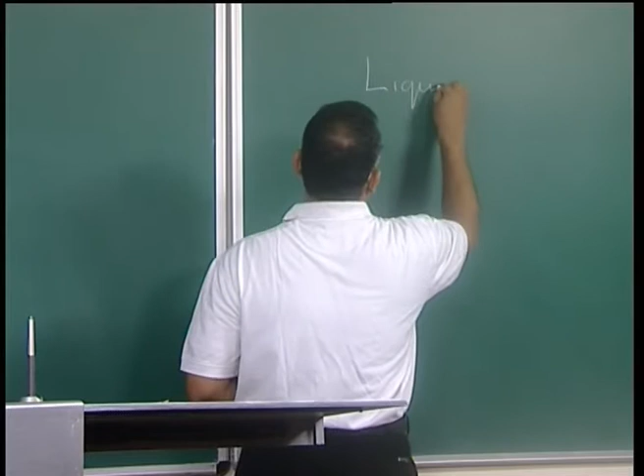So far we have studied phase transformations, and even when we consider a simple phase transformation, for instance, suppose I am talking about solidification from the liquid state to the solid state. For now I will assume that there is a pure metal which is in the liquid state which is getting solidified. So the final solid typically consists of a polycrystalline microstructure.

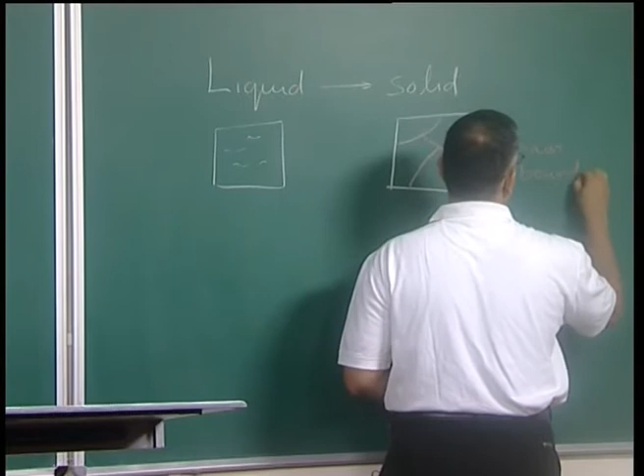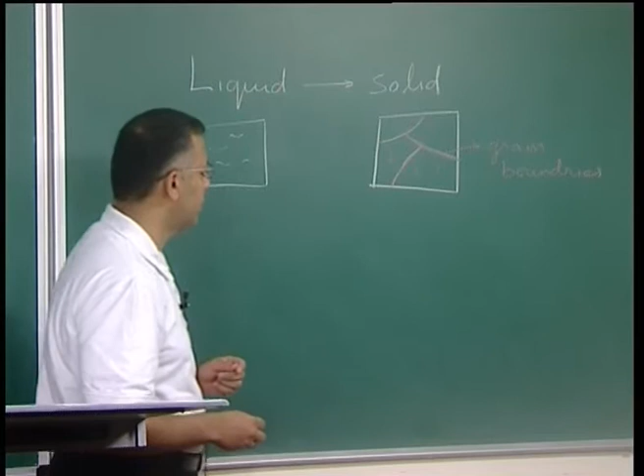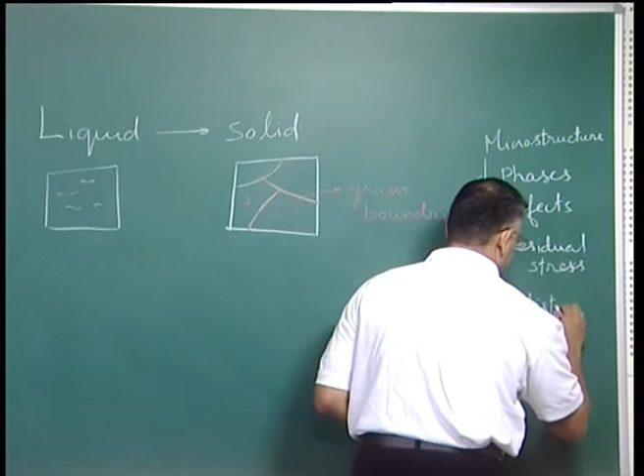That means there are entities like grain boundaries, and within these grains themselves there are defects like dislocations present. That means that along with this phase transformation, I have a complete transformation of the microstructure, and we have already defined a microstructure as... so along with this phase transformation, whereas the simplest one we can think of, a pure liquid going to a

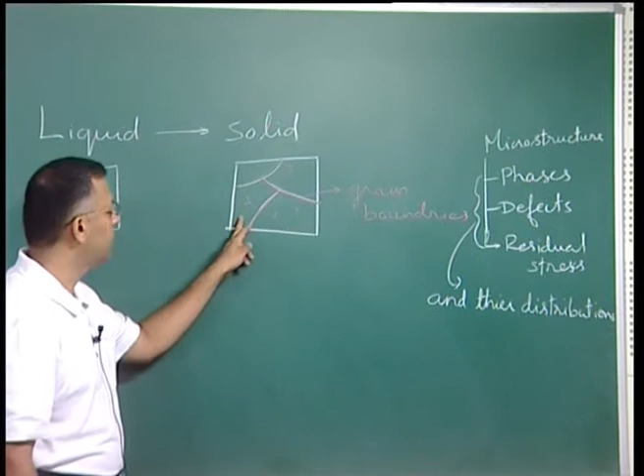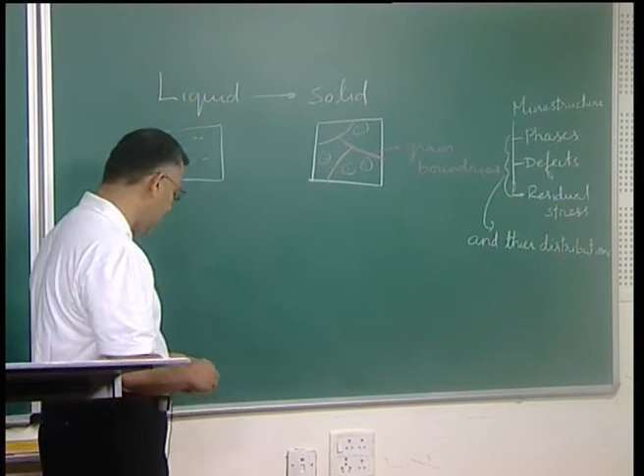solid, we have complete change in microstructure. For instance, the solid phase forms, there are defects like grain boundaries and dislocations, and there are stress fields associated with these dislocations. That means that all the components of the microstructure change when there is a phase transformation. But let us now consider certain other types of transformations wherein in true sense there is no change in the phases, but it is the subtler aspects of microstructure which get transformed.

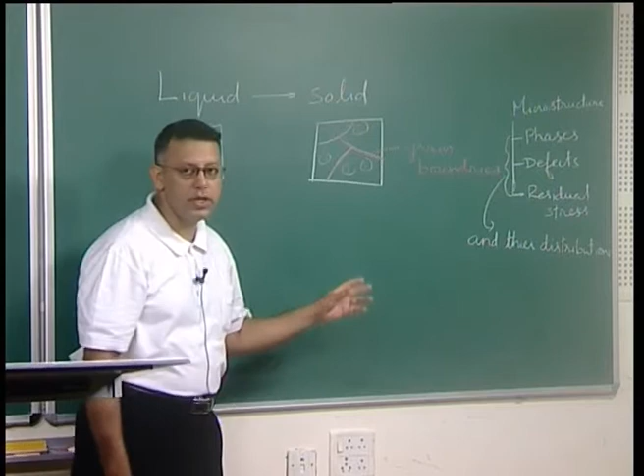So let us consider those kind of features, and we talk about three of them here. One is called recovery, other is recrystallization, and third is grain growth.

Suppose we plastically deform a material, and we typically call this, when you do it under cold conditions, as cold work. Under such circumstances, typically the point defect density, typically vacancies etc., increases, and also the dislocation density increases.

Now, at the end of these set of slides, we will try to understand the correct definition of cold work. For now we will assume that it is a temperature regime, that means we are at a low temperature regime. Typically let us assume now that we are less than about 0.3 Tm, and we are doing working which is called cold working, and in the process we are increasing the defect density, which includes the point defect density and the dislocation density.

So when I am doing cold working, the material becomes a store of energy and the strain energy in the material increases. Typically if you are spending say X amount of energy, about 1 to 10% of this energy expended is stored in the form of strain in the material, and this strain typically we have seen is via the increase in dislocation density and other defects within the material.

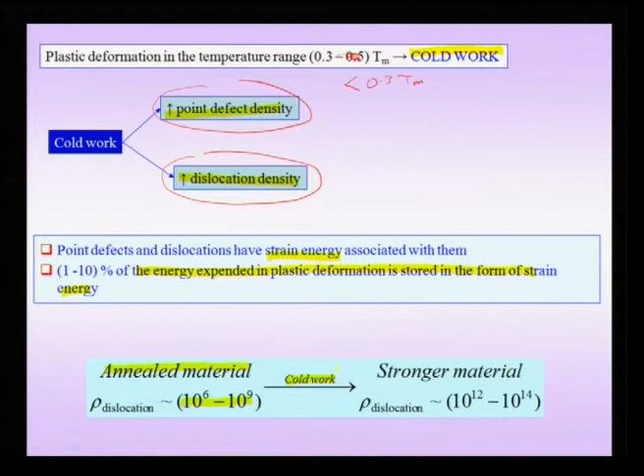Now that implies that suppose I have a well annealed polycrystalline material, like let me take copper or aluminum. The dislocation density is of the order of about 10^6 to 10^9, and when you do cold working of this material, not only does the material become stronger because of this cold work, but the dislocation density increases to about 10^12 to 10^14.

In fact, it is the increase in dislocation density which is causing the increase in strength of the material. So there is a few orders of magnitude increase in dislocation density, and as you have seen, the strain fields of these dislocations store energy, and about say for instance about 1/10 or about 1/100th of the energy expended in cold work is stored as strain energy within the material.

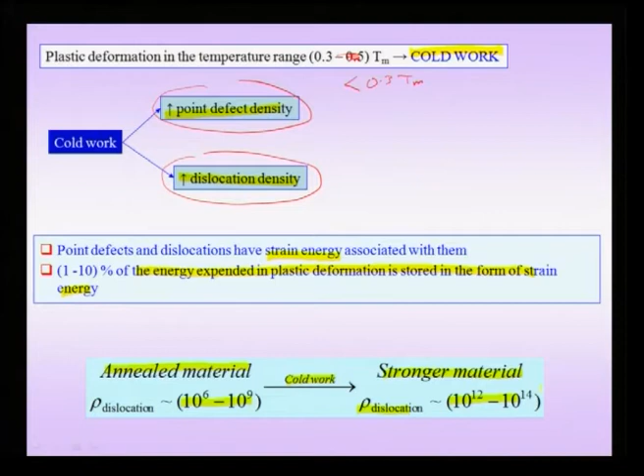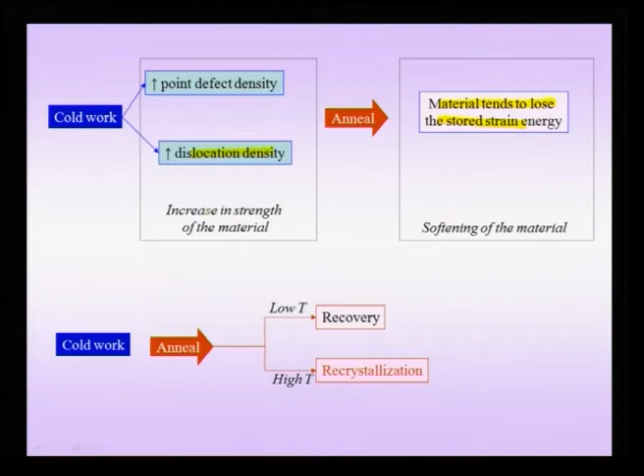Now when you anneal such a material, that means heat it to some temperature and hold it, the material tends to lose the stored energy and tries to come back to its original state. That means a state wherein the defect density is small, and that implies if I am doing cold work, I have an increase in defect density leading to an increase in strength of the material, and after annealing the material becomes softer and the dislocation density would decrease.

This annealing itself can be done under two circumstances. That means we can do an annealing under slightly lower temperatures, or we can do it at higher temperatures. At lower temperatures, of course, we are supplying less amount of activation energy, and the processes which take place are collectively called recovery. And at higher temperatures, we have the phenomena of recrystallization, and we will try to understand these technical terms in little more detail in the coming slides. So, we have a cold work material which has been plastically deformed, for instance by rolling, forging, extrusion, etc.

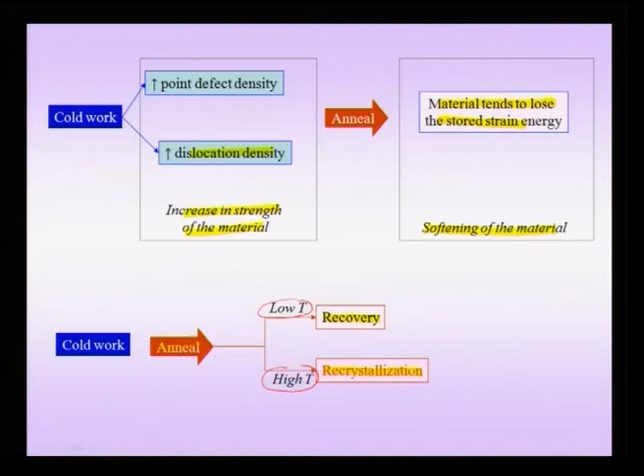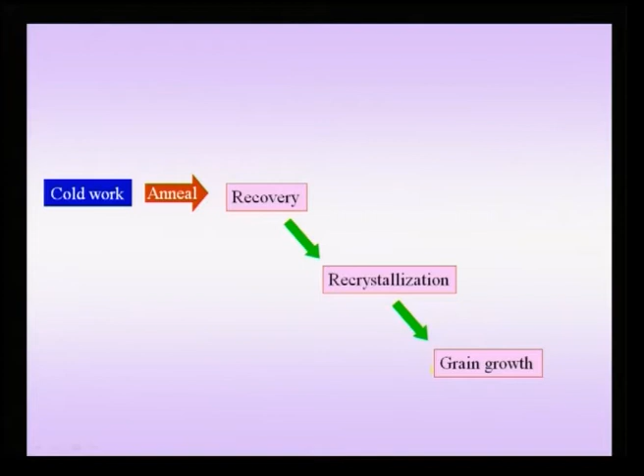After the material has been cold worked, if you heat it to a certain high temperature and hold it, there are two kinds of processes taking place within the material depending on the temperature. At low temperatures you have recovery, and at higher temperatures a phenomenon known as recrystallization. During annealing, if you hold at high temperatures, you would have recovery followed by recrystallization followed by grain growth. At even higher temperatures, there would still be recovery, but since the dominant process is recrystallization, we call it recrystallization.

So in this whole process, we see that the physical properties of the material change, including physical and electrical properties, and you would notice the material is changing its properties due to a change in microstructure. As we pointed out, there is actually no phase transformation involved in these processes - it is what you might call microstructural transformation.

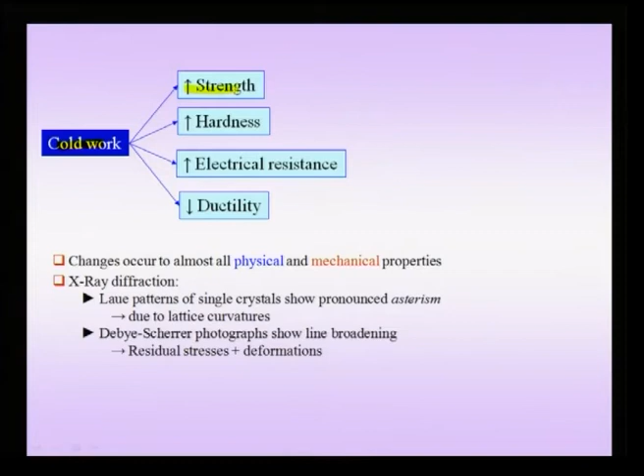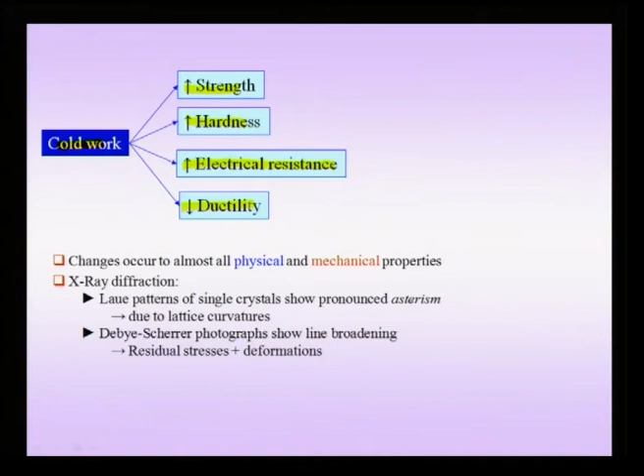Cold work leads to increased strength and increased hardness. It also leads to increased electrical resistance because of the point defect density increase and dislocation density increase, but the ductility of the material comes down. These changes typically occur to almost all physical and mechanical properties, which we call structure dependent properties or microstructure dependent properties.

In X-ray diffraction, you will notice that Laue patterns of single crystals show pronounced asterism - they look star-like and are no longer well-defined spots, and these are due to lattice curvatures. Debye-Scherrer photographs show line broadening, and this line broadening can be used to characterize the strain in the material - we can compute the strain by knowing the amount of line broadening.

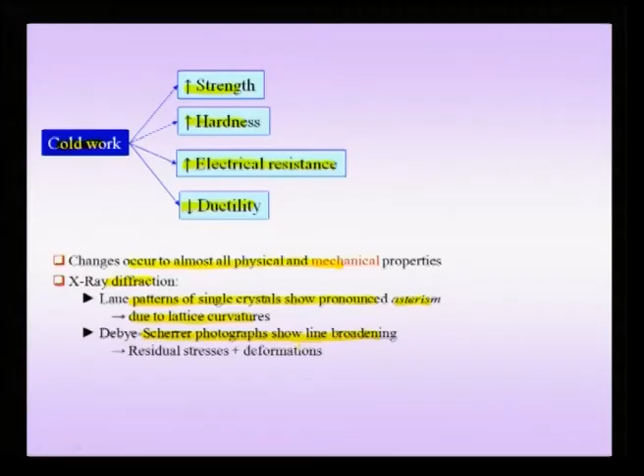So cold work changes many physical and mechanical properties, including strength, hardness, electrical resistance, and ductility. If you do annealing, the reverse, you can actually reverse and get back the material to its original well-annealed state. Now, what does this term recovery mean?

Recovery takes place at low temperatures of annealing, and if you look under an optical microscope, or even a scanning electron microscope - not a high transmission electron microscope - you would note that there is apparently no change in microstructure.

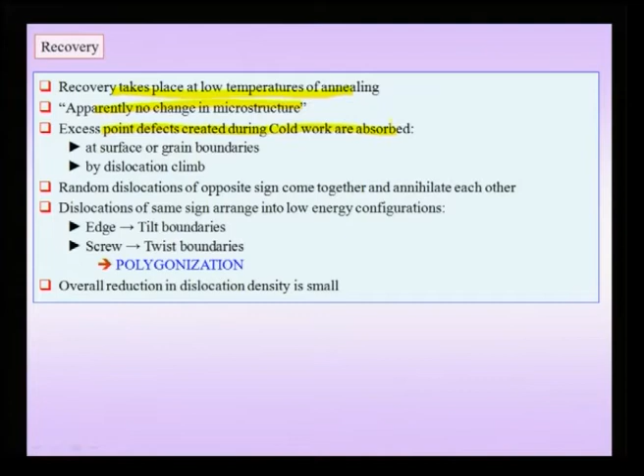This is because the excess point defects created during cold work are absorbed at surfaces and grain boundaries, and also by dislocation climb. As you know, it is not possible to observe vacancies or clusters of vacancies using optical or scanning electron microscopy. Even in a transmission electron microscope it is difficult to observe vacancies, and you have to use indirect methods to find evidence for their presence.

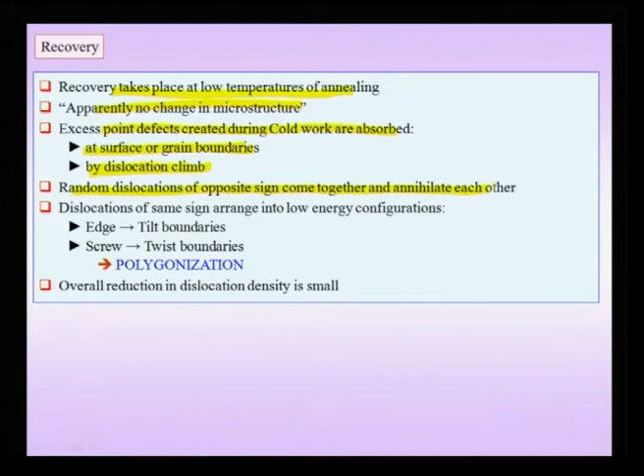Now, certain vacancy clusters can be located in a transmission electron microscope. So during recovery, there is a pronounced decrease in the excess point defect density - vacancies created during cold working are absorbed at grain boundaries or surfaces, and even by dislocation climb, so the vacancy concentration decreases. Additionally, random dislocations of opposite sign come together and annihilate each other. We will see a schematic of that in the next slide, and dislocations of the same sign arrange into a low energy configuration.

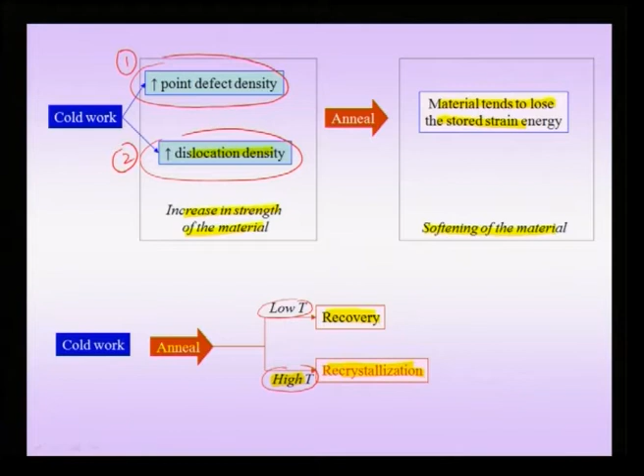First, we have two kinds of defects which we discussed before when we talked about cold work: one is point defects, typically the important one being vacancies, and the second is dislocations. So we have two kinds of defects which have been altered during cold work, and when doing recovery, both these defects are affected - more so the vacancies and less the dislocations.

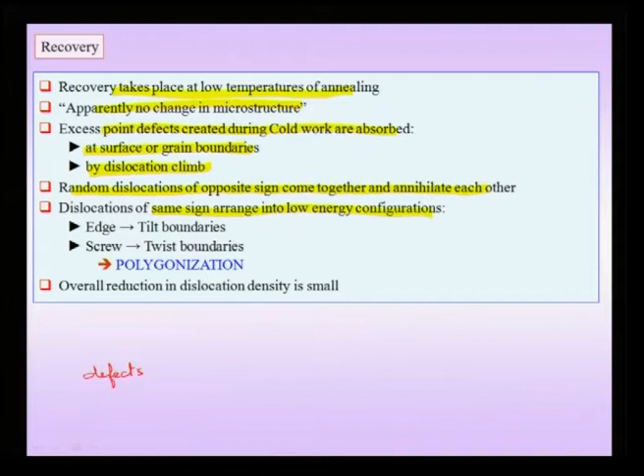If you talk about defects, the pronounced effect is on point defects, which may include self interstitials. There is a lesser effect on dislocations. What happens is that dislocations of opposite sign come together and annihilate each other - they move towards each other and finally you land up with a configuration in which you have a full atomic plane, meaning no dislocation. Additionally, if you have dislocations of the same sign lying on different slip planes, as we will see in the next micrograph, they can come together to form low energy configurations like low angle grain boundaries. So we will come to this slide in a little more detail.

The important point to note is that though there is a small reduction in dislocation density and there are some low energy configurations arising during this recovery, the overall reduction in dislocation density is small.

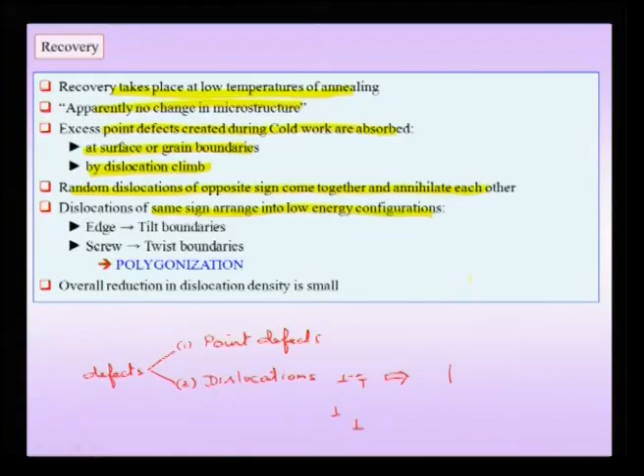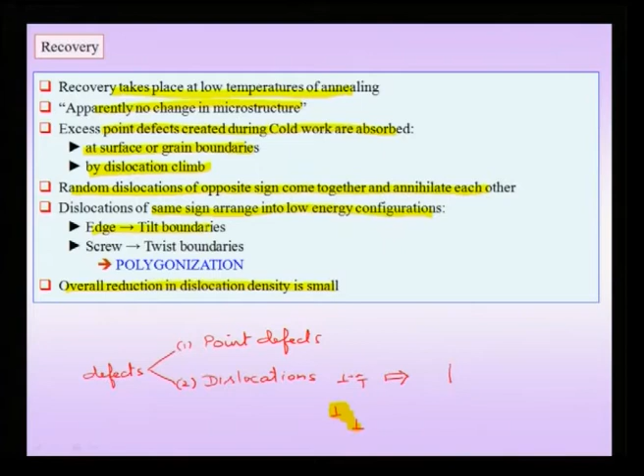This is an important point to note, and when these dislocations of same sign come together, for instance in the schematic here, if they happen to be of edge character, they can form tilt boundaries, and if they are of screw character, they can form twist boundaries. This process in which these low energy configurations of dislocations arise is called polygonization.

Let us try to understand this polygonization. Because of the presence of dislocations, if the dislocations are of opposite sign, they can come together and annul each other. So therefore there are now only continuous atomic planes and there is no dislocation. Originally, we might have started off with a dislocation of one sign and a dislocation of another sign lying on the same slip plane.

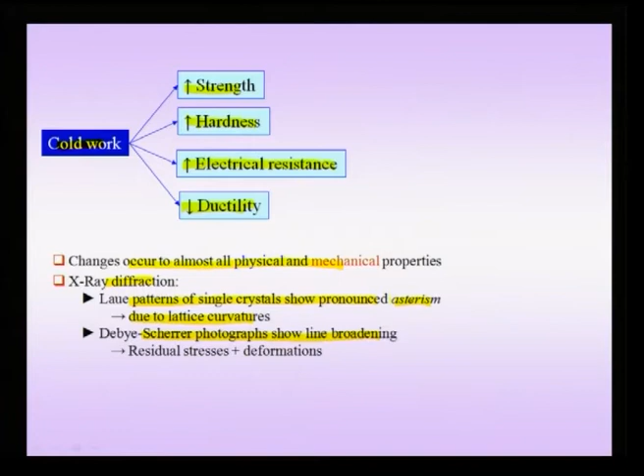By this process they can annihilate each other, but suppose I am talking about dislocations of the same sign present in a certain axis. So many dislocations of the same sign give actually bend the crystal, so there is a pronounced bending of the crystal. Though this bending is small, the presence of many dislocations can give a certain amount of bending to the crystal, and this bending of the crystal due to lattice curvature can lead to effects on the Laue diffraction patterns if you take them.

During recovery, the thermal energy is not so high, so these dislocations cannot move over large distances, but they can come together in close vicinities. That means a few dislocations lying in this regime, which are all on a different slip plane, can all come together. Say for instance these three dislocations can all come together and form a low angle grain boundary.

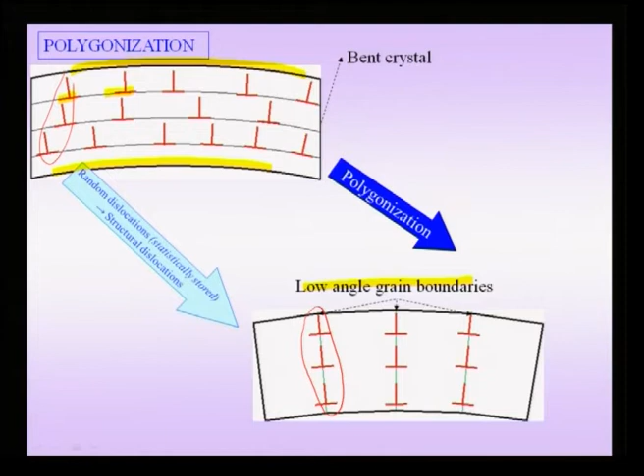This overall phenomena is called polygonization, wherein originally there was a single bent crystal, as you can see here. This is now forming subcrystals. So this is subcrystal 1, then you may have subcrystal 2, and you can have subcrystal 3 and subcrystal 4. So this original single crystal is now split into subcrystals, which now between them have a low angle grain boundary.

In this process called polygonization, an important phenomena which takes place is that these random dislocations, otherwise called statistically stored dislocations, become structural dislocations. We know that the role of statistically stored dislocations in plasticity is very different from those of structural dislocations, but in this process random statistically stored dislocations, by their motion and rearrangement, become structural dislocations, and therefore now the material is split into subgrains with low angle grain boundaries between these subgrains.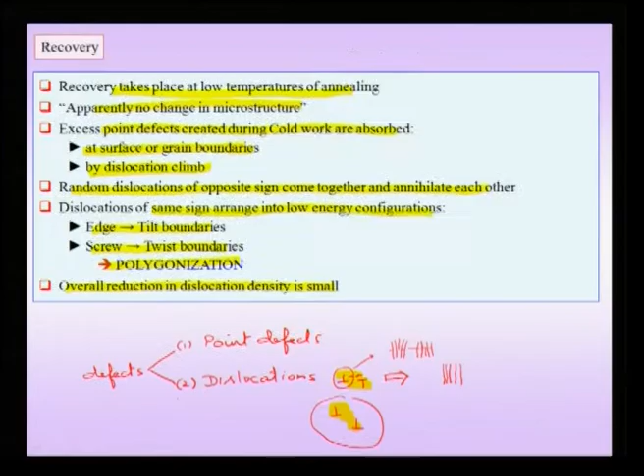Let me summarize what takes place during recovery. During recovery, a material partly goes down to a lower energy state, but because the thermal activation is not very large, as we have not heated it to a very high temperature, the major reduction is actually in the point defect density, which could include self interstitials and vacancies. These vacancies could be absorbed at surfaces or grain boundaries, or dislocation climb can occur, meaning suppose I had a dislocation here and there are some excess vacancies nearby, these vacancies can come and sit at the base, so the atom can come and fill up this space. In that process the dislocation has gone up one level, and this is the climb process by which vacancy concentration comes down. Of course the opposite takes place if a self interstitial diffuses to the core of the dislocation.

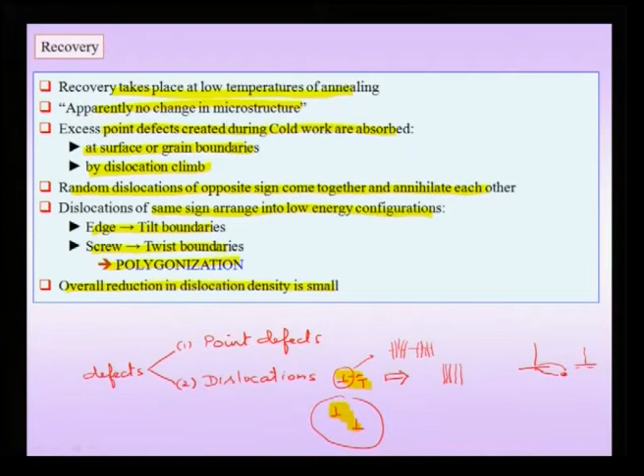More importantly, we noted that though there is no observable change in an optical or scanning electron micrograph, there could be rearrangements of dislocations which can be seen in a transmission electron microscope, but the overall reduction in density of dislocations is only small.

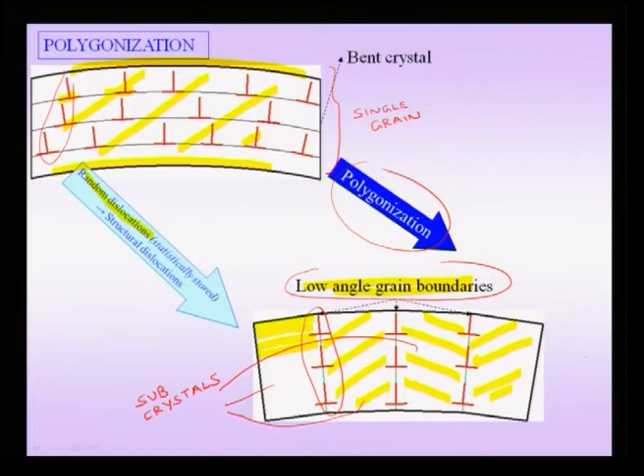That means the material still has a reasonable dislocation density, and we may end up forming this polygonized subgrain structure. Now suppose I do my heat treatment at even higher temperatures, say above 0.3 Tm, then there is a possibility that I can refresh my entire microstructure.

That means now we can have nucleation and growth of new strain free crystals, and this implies that the dislocation density and the vacancy or point defect density in these new strain free crystals will be very small, and the material would have been restored to its original annealed state present before cold working started. So we can have nucleation and growth of strain free crystals.

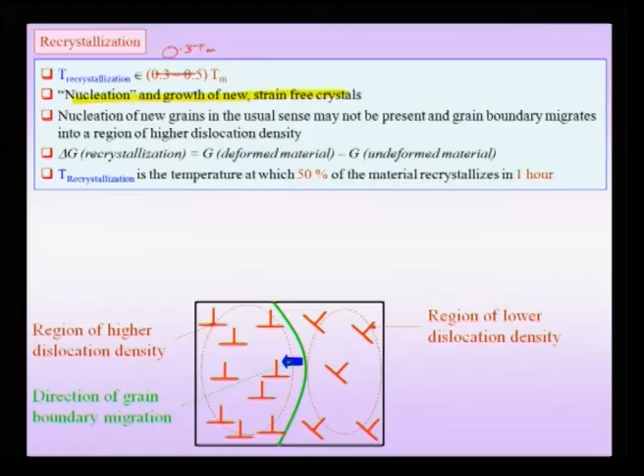Sometimes nucleation of new grains in the usual sense may not be present, and grain boundary migration to regions of higher dislocation density may lead to the formation of strain free grains.

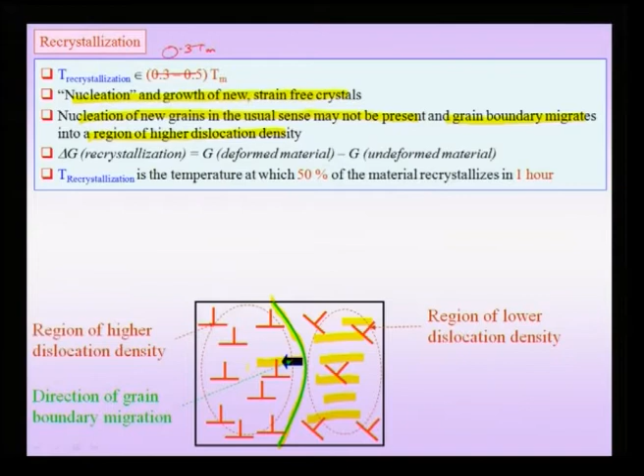So you can see in the schematic below, there is a grain boundary here, and on one side there is a region of low dislocation density. On the other side there is a region of higher dislocation density, and this grain boundary, assumed to be a high angle grain boundary, sweeps into the region of higher dislocation density. In the process the dislocations are absorbed at the grain boundary, and the overall dislocation density in the left hand side grain also decreases.

So the region which was originally grain 1 will have a reduced dislocation density. Of course, we may have formation of new strain free crystals which may grow, which also leads to a reduced dislocation density. And the driving force for this process is the fact that the free energy of the deformed crystal is higher than the free energy of the undeformed material, and therefore you have a free energy benefit when the material comes down to a low energy state.

There is a temperature defined in this context called the recrystallization temperature. Suppose I am using recrystallization as an intermediate step during some kind of mechanical working process like forging, then I need to hold my material at a certain temperature so that I have a significant amount of softened material which can take further deformation without cracking.

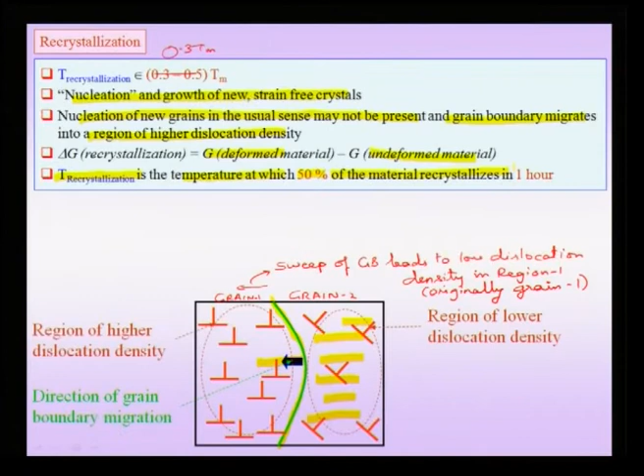A few points about recrystallization temperature. Once again, what is the definition? It is the temperature at which 50% of material recrystallizes in 1 hour. If you increase the amount of deformation, the recrystallization temperature decreases - that means the more deformation I give, the lower the temperature I have to heat to form these strain free crystals. If my initial grain size decreases, the recrystallization temperature also decreases.

If you have a high amount of cold work, that means higher deformation, along with low initial grain size, the finer will be the final recrystallized grains. Therefore, if I am interested in producing a fine crystallite size, I need to start with a lower grain size and apply a high amount of cold work.

If the cold work temperature increases, then a lower amount of strain energy is stored in the material, because some of these processes, like recovery, can take place while deformation is in progress. Therefore my recrystallization temperature increases, because less energy is stored. The rate of recrystallization is an exponential function of temperature.

This is something like Arrhenius behavior, but we have to note that at the heart of recrystallization there is not one single process but multiple complex processes. Therefore, the activation energy calculated using this Arrhenius kind of function is not for a single process but for a complex set of processes.

The recrystallization temperature is a strong function of the purity of the material. Suppose I take the recrystallization temperature of a very pure material, it is of the order of 0.3 Tm, but for an impure version of the same material, it is between 0.5 and 0.6 Tm.

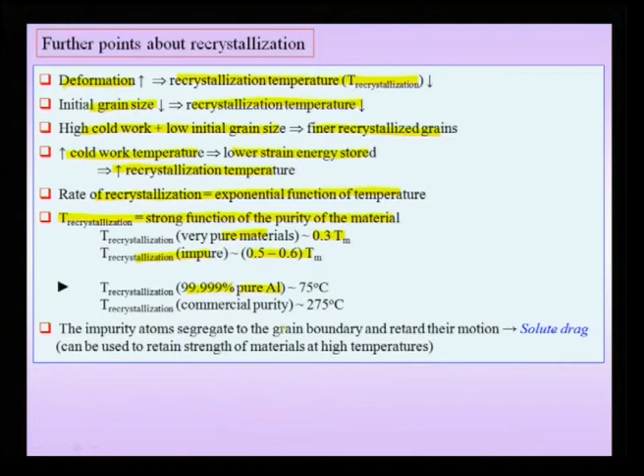For example, if you take pure aluminum, about 99.999% aluminum, the recrystallization temperature is about 75 degrees Celsius. But if I take commercial purity aluminum, which may have other impurities, the recrystallization temperature increases to about 275 degrees Celsius.

The reason for this is that impurity atoms need not always be equally soluble in the lattice or the grain boundary. Many of them may have poor solubility in the lattice, and therefore they tend to segregate at grain boundaries, which typically retards the motion of the grain boundary itself.

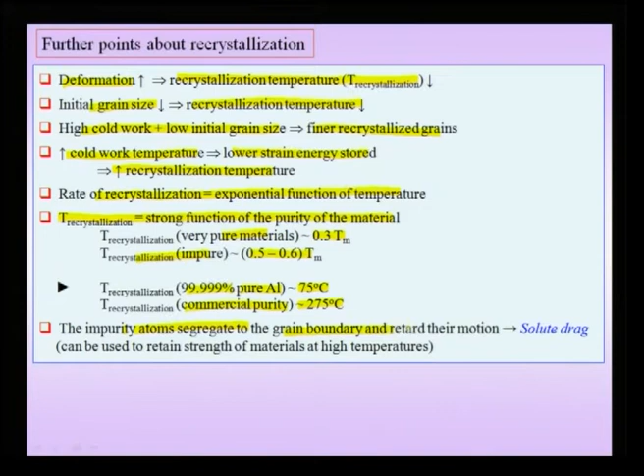This is called solute drag, and it can be used to retain the strength of materials at high temperatures.

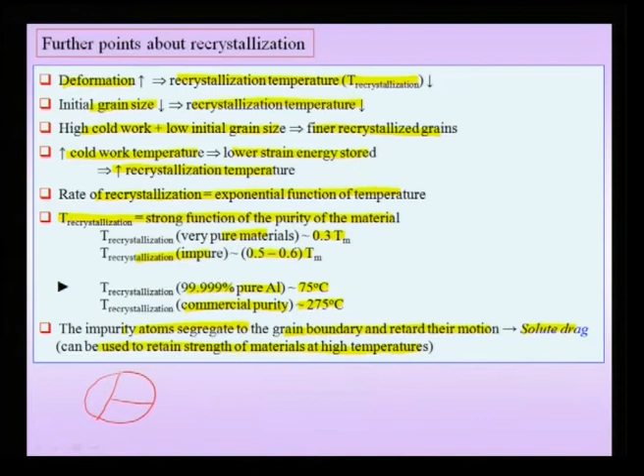So consider a pure polycrystalline material with grain boundaries that are pure. On the other hand, in a material of lower purity, you would find that at least some elements tend to segregate at the grain boundaries.

Now, if this grain boundary has to move, and there are solute atoms segregated at it, when the grain boundary moves out, the solute atoms would be left inside the grain. This is an energetically unfavorable situation, because these elements are typically not very soluble in the lattice.

Therefore, these elements have to diffuse along with the grain boundary so that they remain segregated at it, and this coupled process is slower compared to just the motion of the grain boundary alone.

So, clean grain boundaries can move easily, while grain boundaries with segregations cannot move as easily. Therefore, these grain boundaries feel what you call a solute drag, and in the process recrystallization becomes difficult in such materials. This solute drag can be used to retain the strength of materials at high temperature.

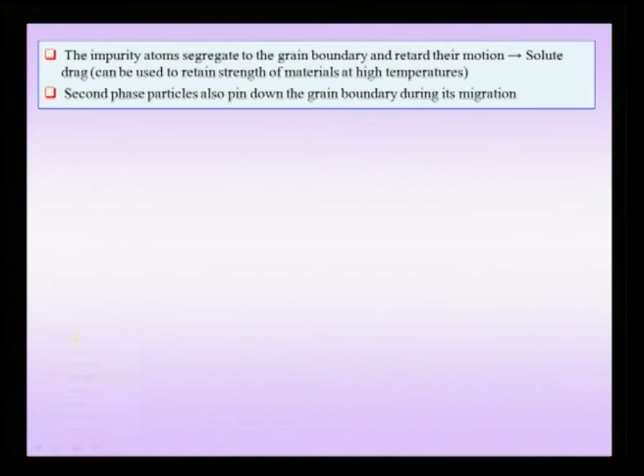That means recrystallization does not take place readily, so the energy put in as cold work remains, and the stronger material stays strong even at higher temperatures. To repeat, the impurity atoms segregate to the grain boundary and retard their motion. This process of solute drag can be used to retain the strength of materials at high temperatures.

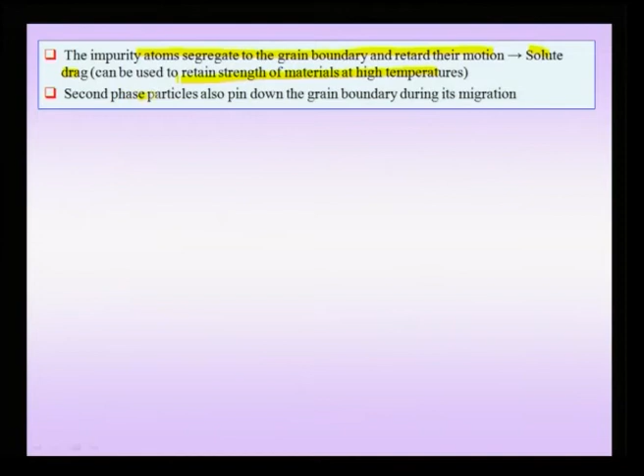Apart from solute atoms, you may also have second phase particles or precipitates that sit at the grain boundary, which may also retard the motion of grain boundaries.

Let us summarize the factors which affect recrystallization. We are concerned with the amount of deformation and the recrystallization temperature in particular: how much deformation I have caused to the material, at what temperature, and in other words, how much of this input energy is actually stored in the microstructure in the form of defects. We noted that the higher the deformation or energy stored, the lower the recrystallization temperature. Additionally, we noted that it is a function of the purity of the material.

So, we have to worry about the amount of deformation we put in, the purity of the material — the lesser the purity, the higher the recrystallization temperature, as nicely demonstrated for the case of aluminum, where the recrystallization temperature can drastically increase if you take an impure material. Further, we also have to worry about the grain size of the starting material which was deformed.

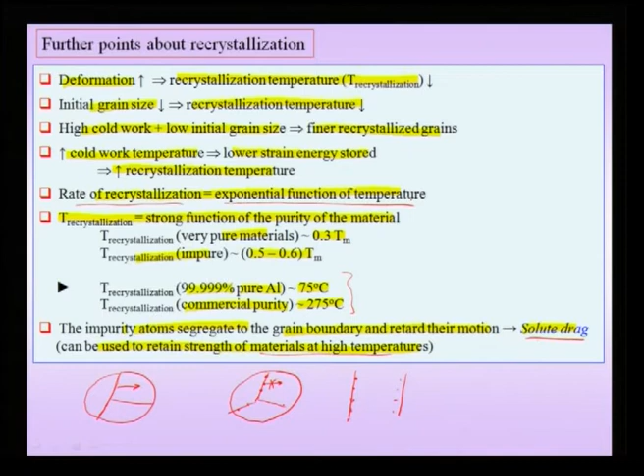Additionally, we had noted that the rate of recrystallization is an exponential function of temperature, and it looks like an Arrhenius equation. But this activation energy, we should note, is representative of very many complex processes taking place, and should not be interpreted in simple terms as if recrystallization were a single fundamental process.

Now we are in a position to define what is cold work, what is hot work, and what is warm working. Since we now have a correct platform to define these terms: if you do plastic deformation above the recrystallization temperature, this is called hot working, which implies that the material can spontaneously recrystallize as deformation is taking place. This also implies that the material constantly remains soft and its ductility is not lost while working is taking place.

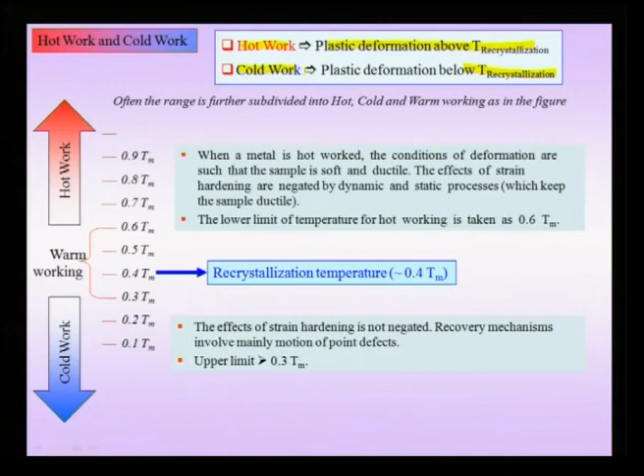On the other hand, suppose you do plastic deformation below the recrystallization temperature — it is called cold work, and this range can further be subdivided into three regimes. If I do it typically above 0.6 Tm, I call this hot working. If I do it in the low temperature regime below 0.3 Tm, then I call it cold working, wherein typically my material becomes a battery of energy and the defect density increases.

That means that in the cold working regime, the effects of strain hardening are not negated — recovery mechanisms involve mainly motion of point defects, and the material tends to accumulate these defects so its ductility reduces, but its strength increases. When a material is hot worked, on the other hand, above this 0.6 Tm regime,

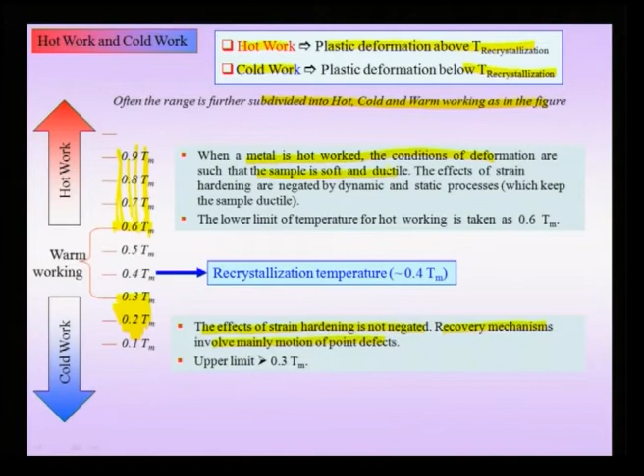so I am in this high temperature regime, the sample remains soft and ductile. The effects of strain hardening are negated by dynamic and static processes which keep the material ductile — that means there are processes taking place while the deformation is happening. The lower limit of hot working is typically taken as 0.6 Tm.

The temperature regime between the two, between 0.6 and 0.3 Tm, is often called warm working, wherein of course there is some amount of recovery and some amount of recrystallization taking place, but it is a regime between hot working and cold working.

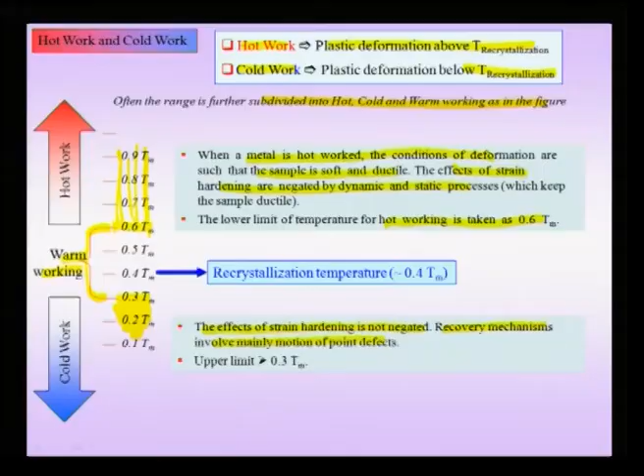So if a person wants to increase the strength of the material, he would do cold working. On the other hand, if he wants to maintain extended deformation of the material without any intermediate processing steps like recrystallization, he would do hot working of the material. So somewhere between the two is typically quoted as the recrystallization temperature, which is about 0.4 Tm.

Finally, even in a recrystallized material — which is in a lower energy state compared to the cold worked material, because now the dislocation density is smaller and the point defect density is smaller — we still have energy stored in the form of grain boundaries, meaning interfacial energy in the form of grain boundaries. This energy the crystal can lower by causing a phenomenon known as grain growth.

In grain growth, what we notice is that not all grains can grow. What it implies is that the larger grains grow at the expense of smaller grains, so that my overall grain size increases. So let me show this schematically on the board.

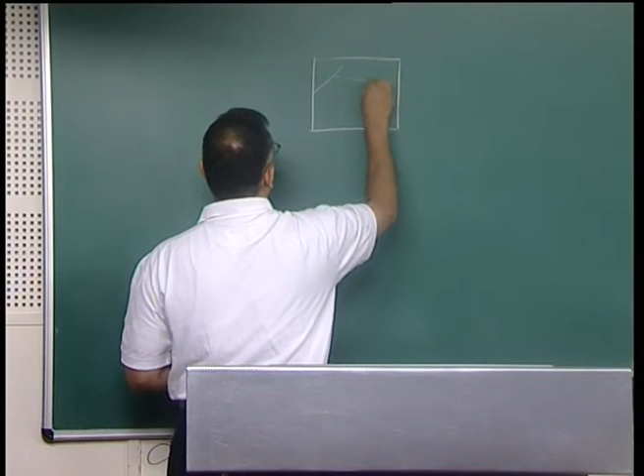So initially we have, say for instance, a fine grained material, which could be a recrystallized material. So I have my grain structure, and after grain growth I would notice typically that my grain size would have increased. For instance, there were so many grains in this place — 1, 2, 3, 4, 5, 6 — and I have only 2 grains in this place. So grain growth implies that my average grain size increases, meaning the grain boundary area per unit volume decreases.

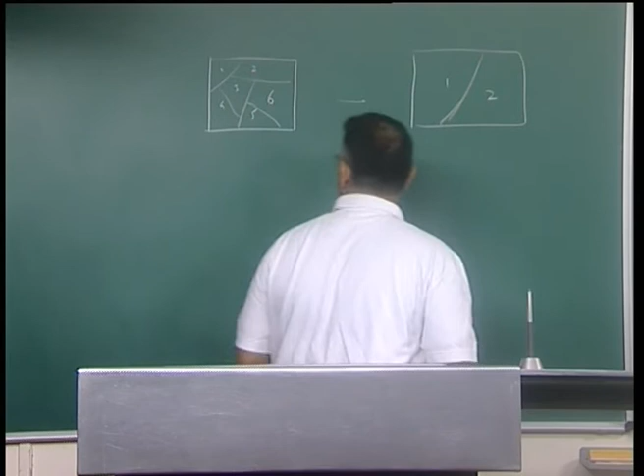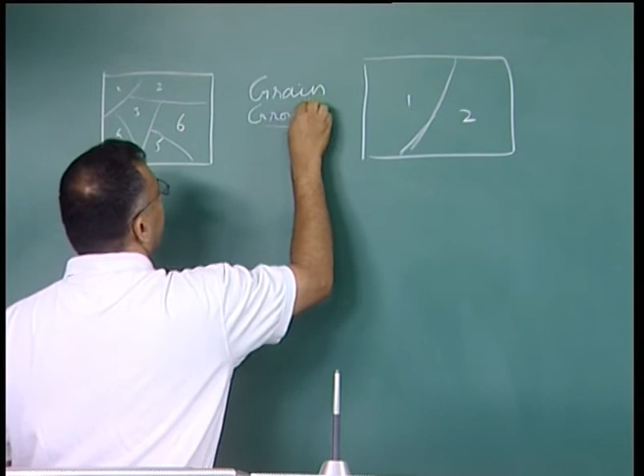The grain size increases, number one.

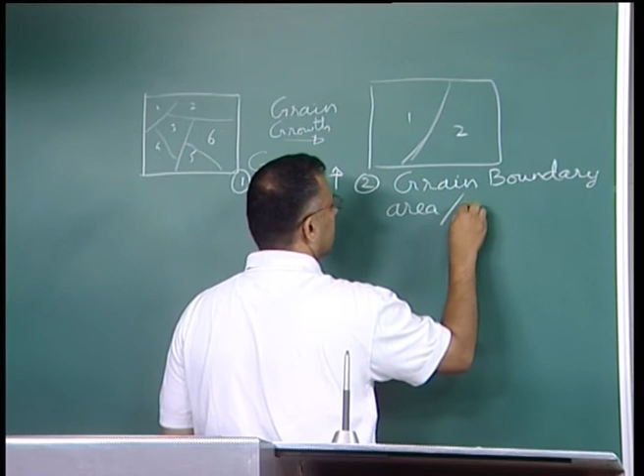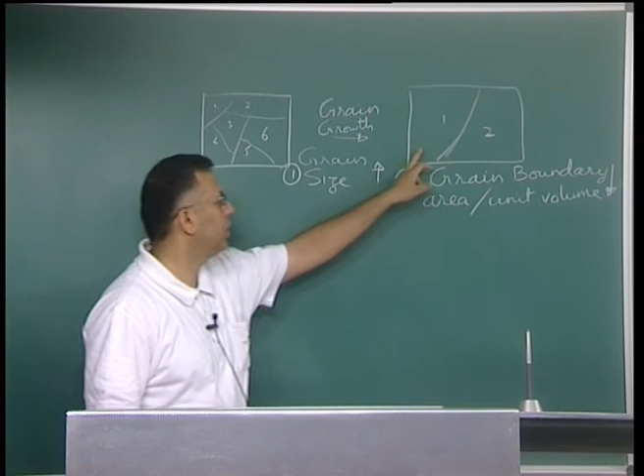So, what is the driving force for this? The driving force is the fact that the grain boundary area per unit volume in a fine grain structure is more as compared to a coarse grain structure. That means during grain growth, my grain boundary area per unit volume decreases, which means my energy associated with the grain boundaries decreases.

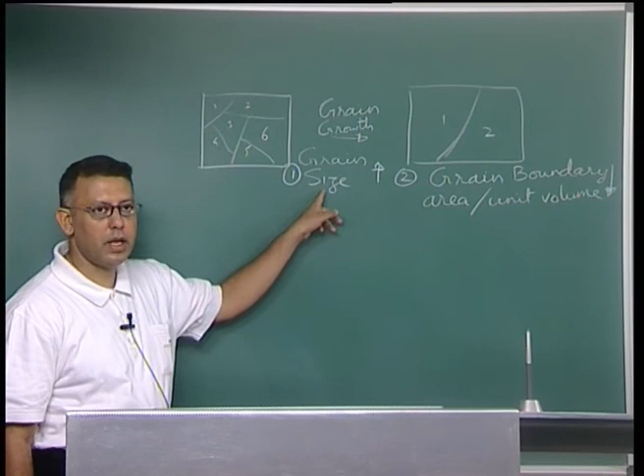This is happening by an increase in grain size. Of course, grain size increase does not mean that each one of these grains is increasing. There, for instance, in a structure like this, there could be small grains like this. This small grain may vanish, typically at the expense of the larger grain. That means the smaller grains vanish at the expense of the larger grains.

So, two important things I have to note. Overall, there is a reduction in interfacial energy as I grow from a fine grain material to a coarse grain material.

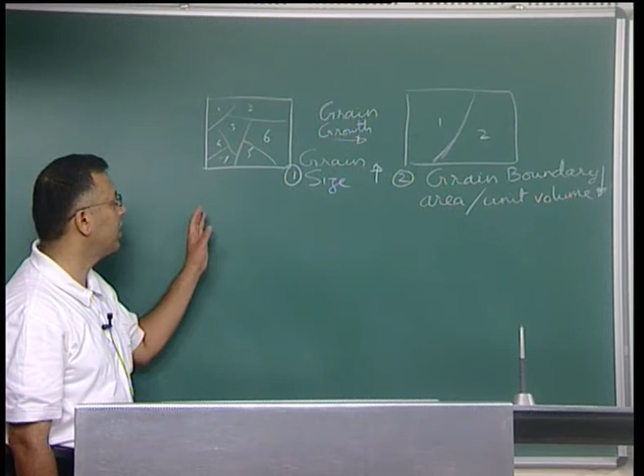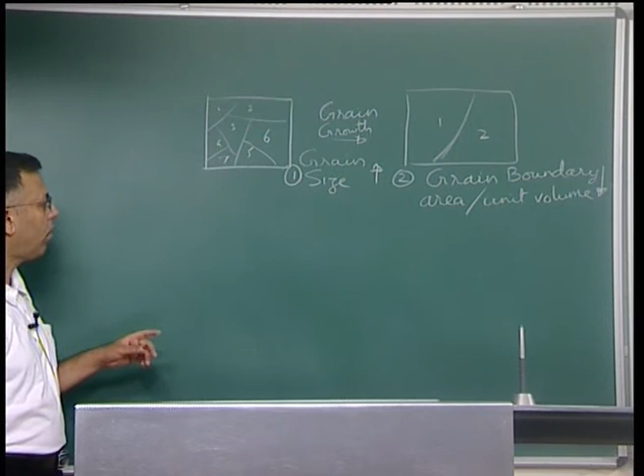Because of my increase in grain size, my strength decreases as compared even to a recrystallized state, because the grain size goes into the Hall-Petch relationship for the determination of strength. That means my yield strength would decrease as I go from fine to coarse grain. Even though the dislocation density does not change much when I go from a fine grain to a coarse grain during grain growth, my overall strength can drop because of the Hall-Petch effect.

Now, what drives this process globally is very clear. It is a reduction in the grain boundary energy. So globally, it is actually a reduction in grain boundary energy which drives this process.

But for every process to take place, we have to worry about two criteria. One is known as the global criteria, which is typically a thermodynamic criteria, but additionally we also have to worry about a local criteria, which sometimes may behave like a stress or a stress intensity, or even like a local energy density criteria. To give an example, suppose I am having a material with a crack in it.

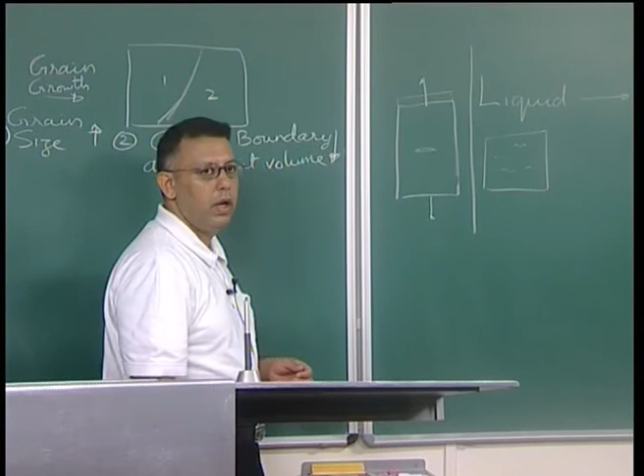Suppose I have a body, a large body in which I have a crack, and I cause the deformation of this body, stretch it a little bit and hold it. Then the strain energy stored in the material can drive the crack growth.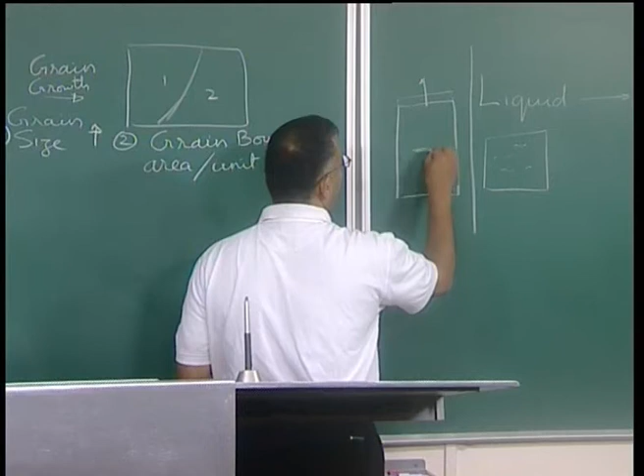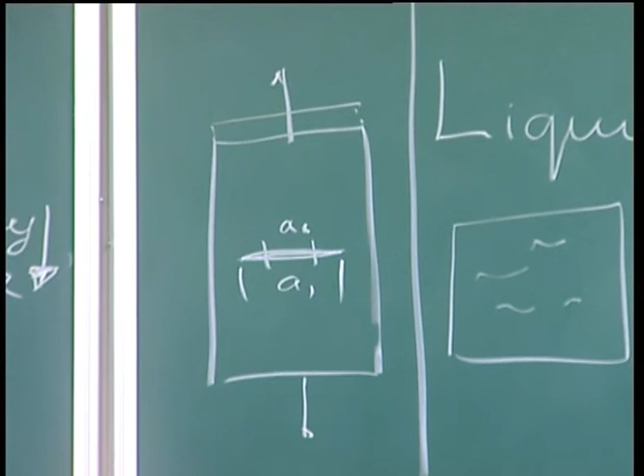Globally I can understand, suppose this crack grows from this length to a longer length. My original length is A0 and it grows to a longer length A1. Then the strain energy is relieved, and that strain energy goes into the formation of the interfacial energy, or the broken bonds, and the overall strain energy of the material comes down.

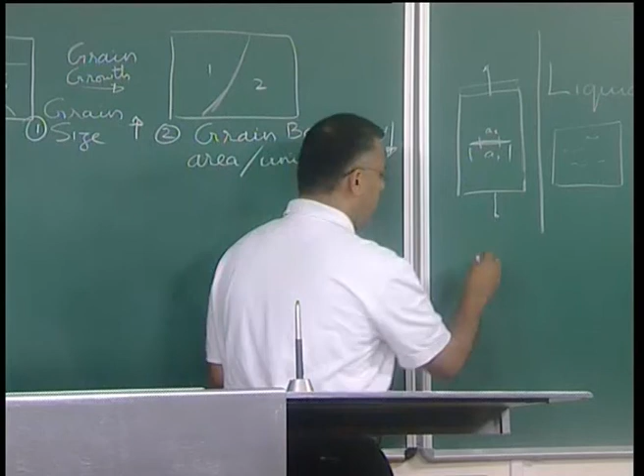But suppose for this crack growth to take place, I know that my strain energy drives this whole process. But on the other hand, if I take a circular crack vis-a-vis a sharp crack like this, it is clear that the stress concentration needed to cause breaking of bonds is lower in the case of a circular crack as compared to a sharp crack.

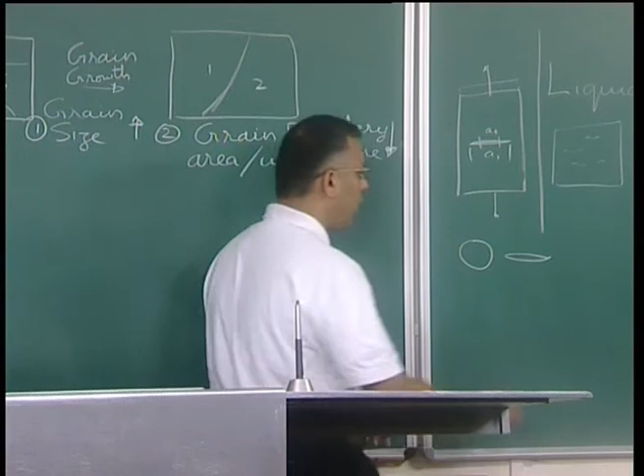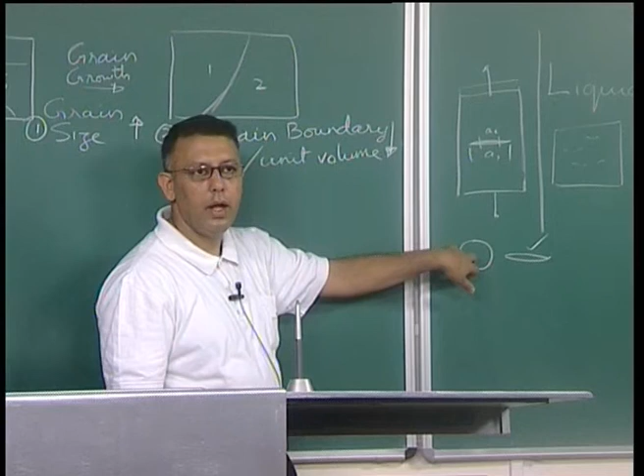That means here I would expect a better chance of crack growth to take place. That means even though the overall energy stored in the body may be large here, crack growth will not take place because locally it is not satisfying the fact that enough energy density or enough stress is available at the tip of the crack to break the bonds.

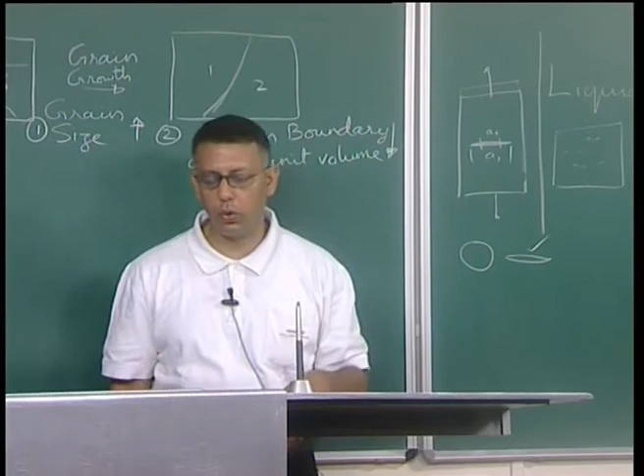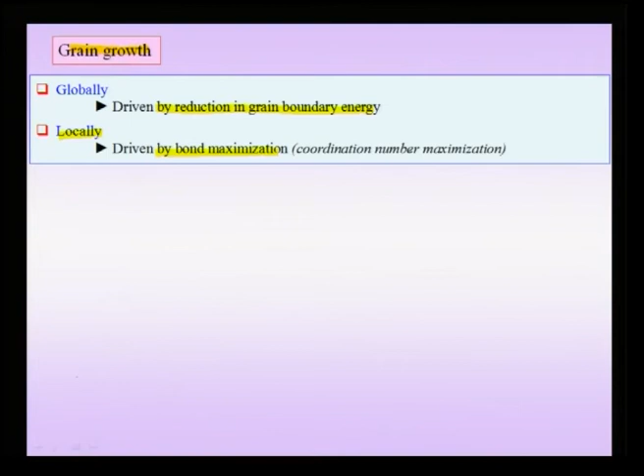So, therefore, as in the case of this crack growth problem, we also have to worry not only about the global criteria but also about a local criteria, and locally it is bond maximization, or what you might call coordination number maximization, which drives my grain growth.

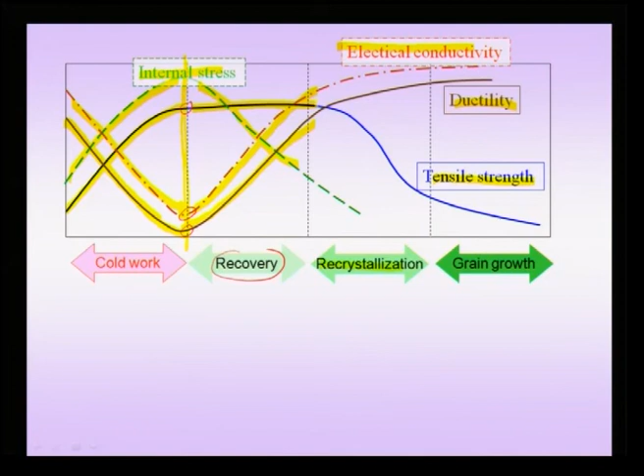If I further hold the material at a higher temperature to cause recrystallization, my tensile strength also comes down. Since my electrical conductivity has already reached a sufficiently high value, it will tend to recover a little more because my dislocation density is coming down, but there is no pronounced change during recrystallization process. But the important change takes place to tensile strength, which seriously falls down, and therefore if I cause recrystallization of the material, my material from strong becomes weak.

So I have this arrow along which it goes, and therefore now my recrystallized material is weak, that means my tensile strength decreases. Of course, it does not fall down to the lowest value possible, and this actually tends to happen only during grain growth. During grain growth there is a further decrease in the tensile strength, and therefore my material tends to lose its strength. My ductility already has come to its original near maximum value. You get a little more benefit, but not much.

But the most important thing, sometimes ductility may even come down because of the increase in grain size. Here we note that the important change is to the tensile strength, which continues to fall if my grain size increases. This is due to the Hall-Petch effect.

So we see here in this slide, which I summarize now, that when I try to take my cold work material with a high defect density and hold it at temperature, I process through stages called recovery, recrystallization and grain growth. At each one of these stages, some of the properties tend to come back to its original state. So during cold work, the electrical conductivity comes down and the ductility comes down while the strength increases, and during most of recovery the strength continues to remain even though I have caused a recovery process.